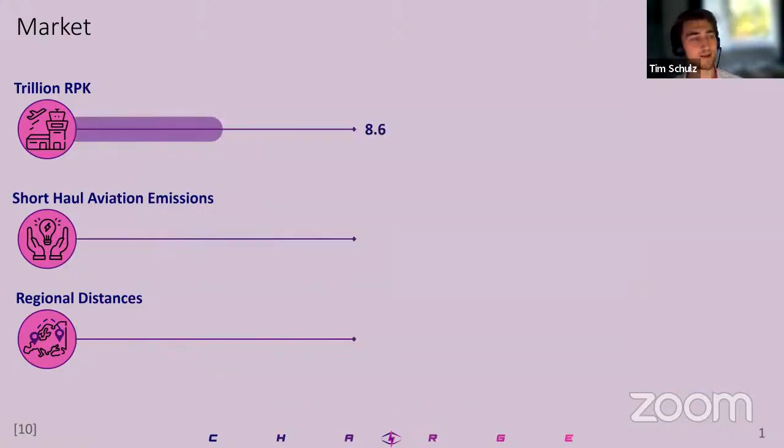Before we started to design a new aircraft, we actually had to figure out if there's any market for it. As stated last year, the aviation industry is still recovering from the previous COVID crisis but will handle the challenge with ease, and is expected to reach about double the amount in revenue passenger kilometers by 2050 compared to last year, which is plenty of market for us and our aircraft.

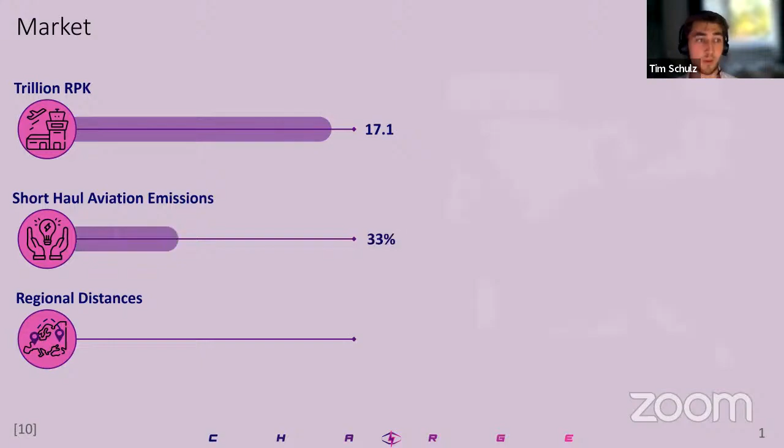That leaves just the question: what market exactly? One of our main focuses is climate change, and roughly one third of all aviation emissions are emitted on short-haul and domestic flights, often covering less than 1,000 kilometers. That's about the range you can see over here on the map.

An example network for those ranges was provided by this year's DLR Design Challenge, and you might notice some of the routes extend well beyond the mentioned 1,000 kilometers. Northern Germany is quite rainy and dark, and the winter isn't that nice, so it's tempting to go south to the warm Italy.

But it's kind of hard to design an aircraft for such a variation of ranges, which is why we were allowed to consider stopover flights, reducing the actual required range to about 900 kilometers—roughly the distance of Hamburg to Edinburgh.

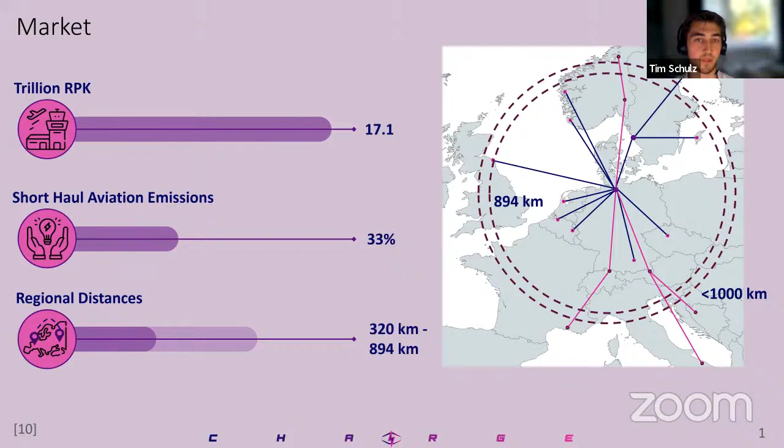It's noticeable to say that for all those ranges and routes, the DLR provided within the task an amount of route demand and a minimum and maximum amount of takeoff and landing slots at the airports, which predetermined the aircraft to about 60 to 120 passengers. That's going to be important later on. But first, let's go back to the routes—how are we going to fly those climate friendly?

It's prognosed that by 2050 air travel will increase, and sadly the greenhouse emissions will roughly double. So it's one of the only sectors that by 2050 will actually have a growth in CO2.

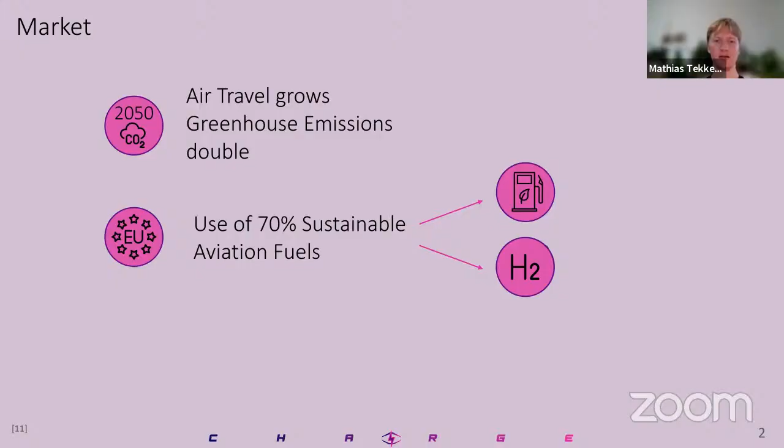But the EU is trying to combat that. By 2050, the EU wants to use 70% sustainable aviation fuels for air travel. There's a legislative act called the Refuel EU Act, and according to that act, only hydrogen and sustainable aviation fuels are considered CO2 neutral. But it's still only 70% of sustainable aviation fuels. So by 2050 and after that, commercial aviation in the EU wouldn't be exactly CO2 neutral.

If you look at another energy carrier, namely electricity, it's prognosed that by 2050, up to 94% of energy generation in the EU would be renewable, so with a very low CO2 footprint. So it can be assumed that by 2050, electricity is a good source for CO2-free energy.

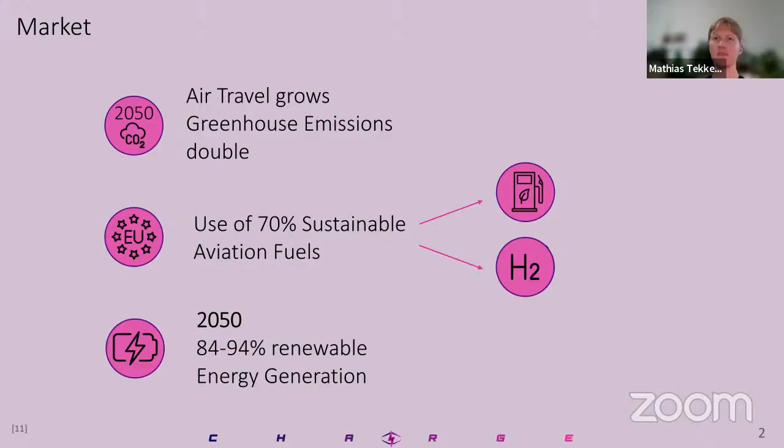But let's also look at the efficiencies of these energy carriers in more detail. In the assignment, we were given to use either SAF, hydrogen, or electricity. On the left side, it shows the total grid-to-shaft efficiency of these energy carriers. It's noticeable that sustainable aviation fuels have quite a low energy efficiency of up to 20%. Hydrogen is marginally better with up to 30%, but battery electric is the most efficient with 77% total efficiency.

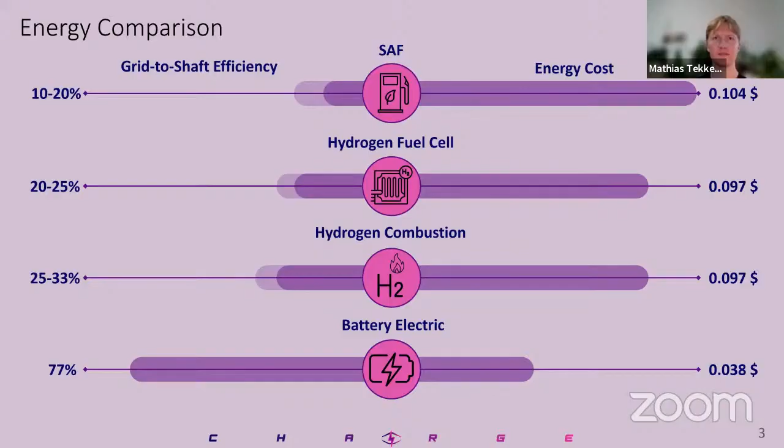Also, when looking on the right side for the energy costs that were also given to us in the assignment, it's noticeable that battery electric is almost a third of the price of hydrogen. So in combination, it's an energy carrier that has a high efficiency and also a low cost. So we were also asking, what do we need for energy, for battery electric flight? What is actually technically necessary?

To combat this, we limited our design to a 40 ton final MTOM and assumed that the empty mass fraction would be around 50%. From there, we deducted that the minimum usable specific energy for our battery packs should be 700 watt-hours per kilogram. And then the feasible empty mass fraction of the aircraft is at 50%.

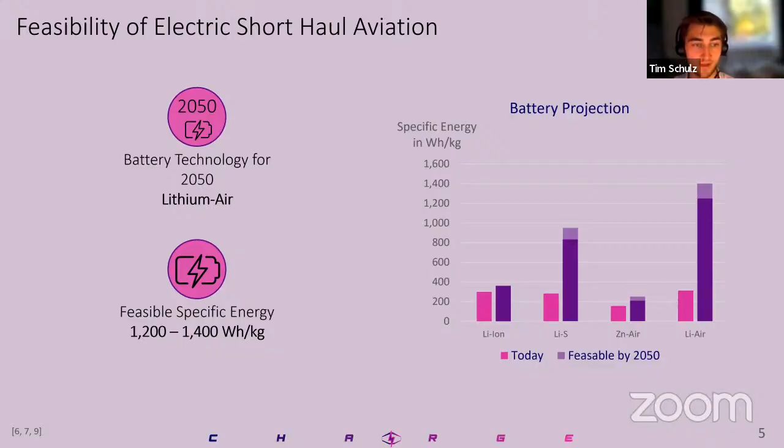But there's another alternative, lithium air. Those batteries bind oxygen from the surrounding air while emitting energy, and are expected to reach up to 1400 watt-hours per kilogram of specific energy in the battery cell by 2050, which is far more than we require for a feasible battery electric aircraft. So to come back to the earlier question, what is necessary for a battery electric aircraft? Lithium air batteries — and they will be there by 2050.

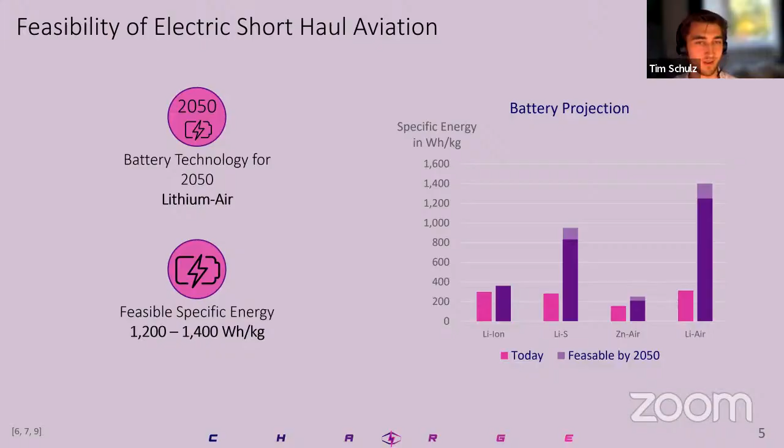So this is why I can introduce charge.

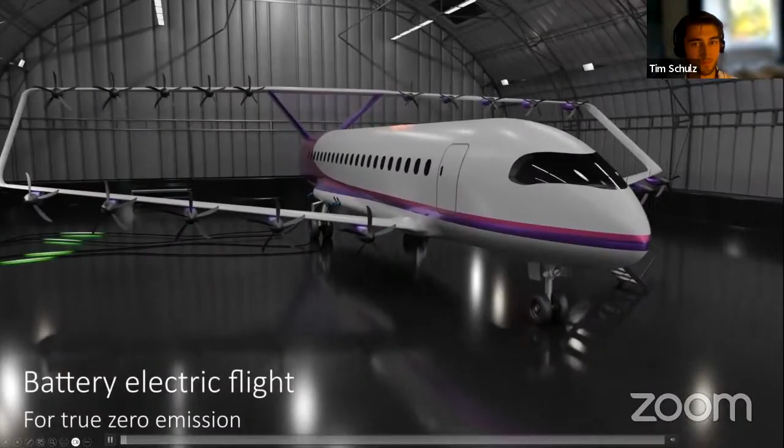Oh, I'm sorry. So I think now you should.

Charge is our carbon-neutral, high-efficiency aircraft for regional electric flight. The marvelous design is characterized by a futuristic-looking box wing, which on one hand provides excellent in-flight efficiency, but on the other hand keeps the wingspan quite low.

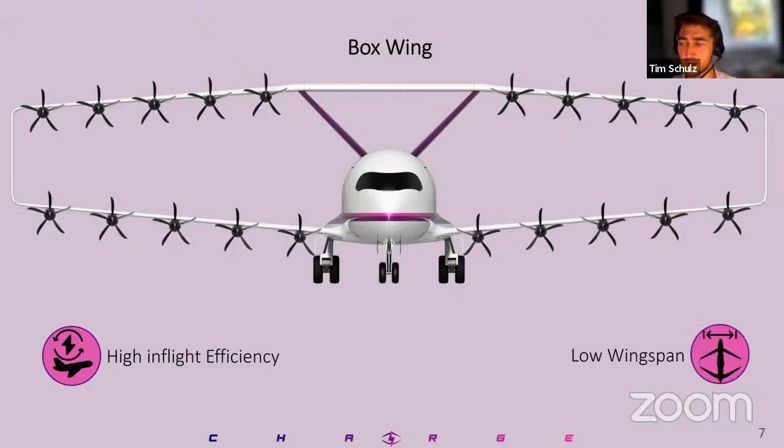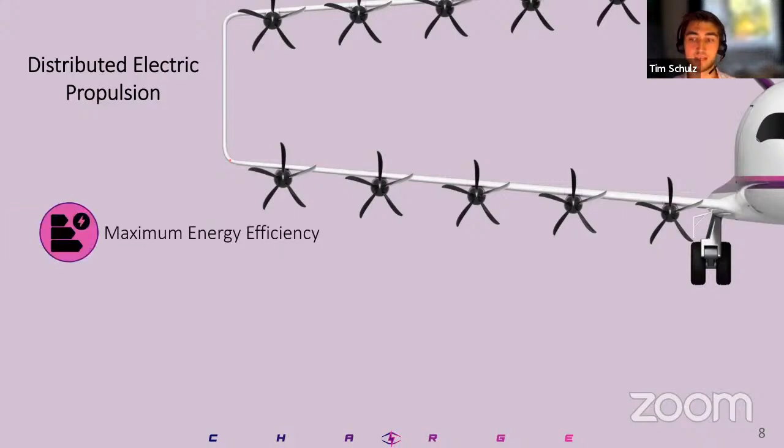Along the wing's edges are spread out 20 propellers, providing us with distributed electric propulsion, which leads to maximized energy efficiency, even during climb and approach, which we do quite steep to reduce noise emissions as far as possible. And since we're using electrical motors, they don't require much maintenance and can cut some costs in this department.

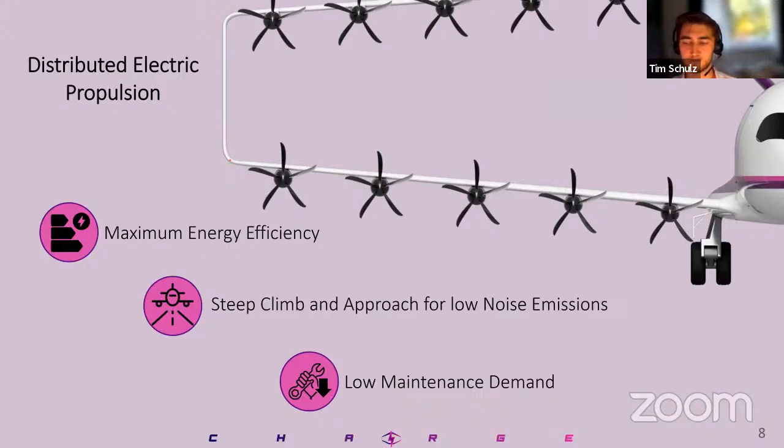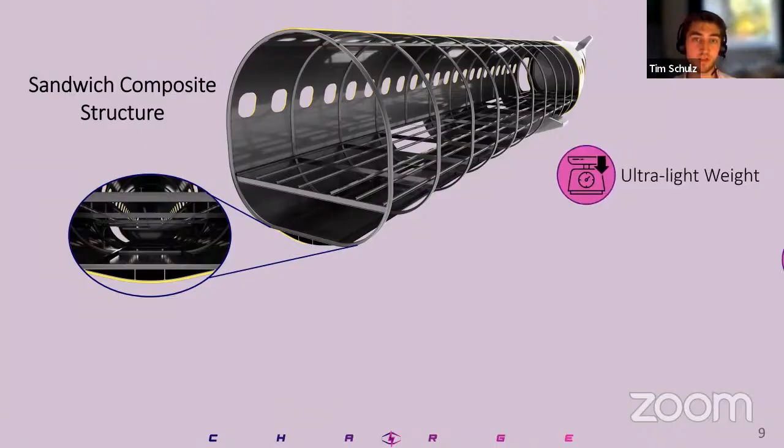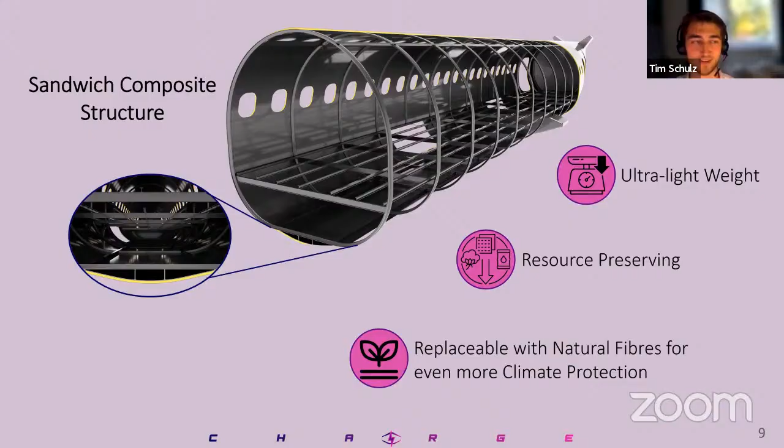Strapped to the wing is our fuselage, built with a sandwich composite structure, which is ultra lightweight and preserves a lot of resources. If technology is ready by 2050, we are opting to enhance or even substitute as many carbon fibers with natural fibers as possible to reduce waste, further reduce emissions, and protect the environment as much as we can. But those are just some empty words - we're engineers, so of course we calculated why Charge is so ideal for its use case.

So as mentioned before, we were not given a specific configuration for the aircraft, but rather a route network and the amount of passengers we had to serve. Based on that, we could have a configuration between 60 or 120 passengers in each plane. The question was, how do we calculate the perfect design for this design mission?

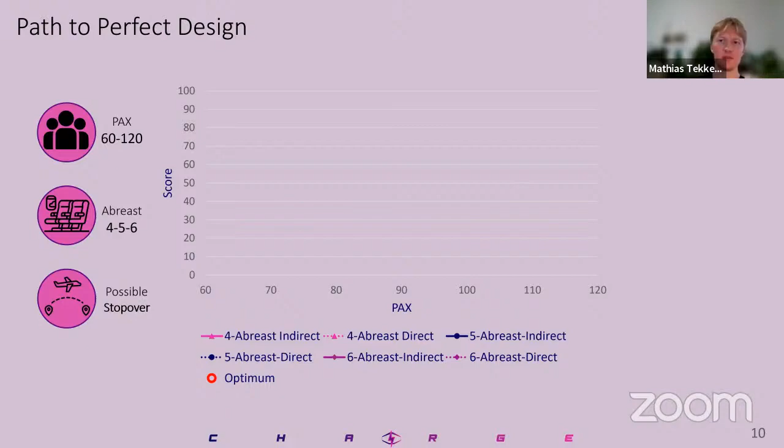For that, we developed a complex iteration process where each abreast and passenger configuration was actually calculated. So each configuration in the plot shown here is actually a valid aircraft design. We also developed a scoring system to score the configurations, and we weighed energy consumption at 70% and the seat kilometer cost at 30%.

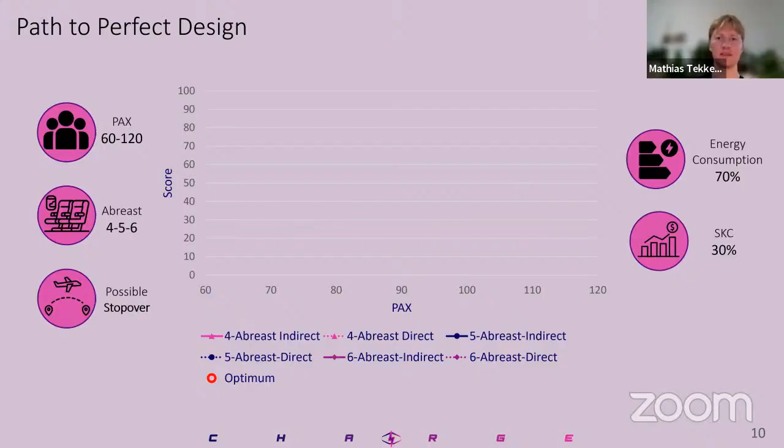In the final configuration, the most efficient was a 110 passenger configuration using the indirect flight network. It's also noticeable that there are two trends on this chart. Firstly, with the increase in passenger numbers, the scoring gets better as the aircraft is more energy efficient per passenger kilometer. It's also noticeable that all the indirect flight configurations with the max range of 894 kilometers have a much better scoring than the direct flight networks.

This can be explained by the increase of the battery mass that's required to fly the 1,400 kilometers compared to the 894 kilometers.

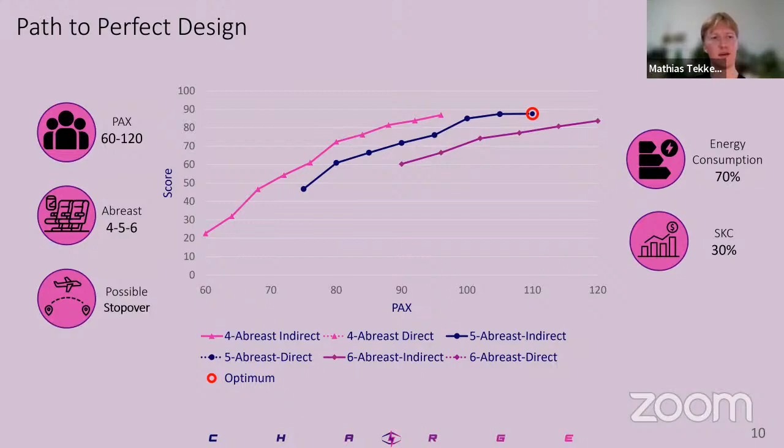In the cabin, the aircraft would have 3 crew members to assist the passengers during their flight or in any emergency cases. Otherwise, it's quite a conventional commercial aircraft with a few galleys and a few bathrooms at the front and back.

But let's also look at the outside dimensions. Because of the box wing design, we were able to limit the wingspan to 28 meters. The aircraft is in the ICAO Aerodrome Category C, which is very useful for our flight network as we have to service smaller regional airports. Otherwise, the aircraft is roughly 31 meters long and just under 8 meters tall.

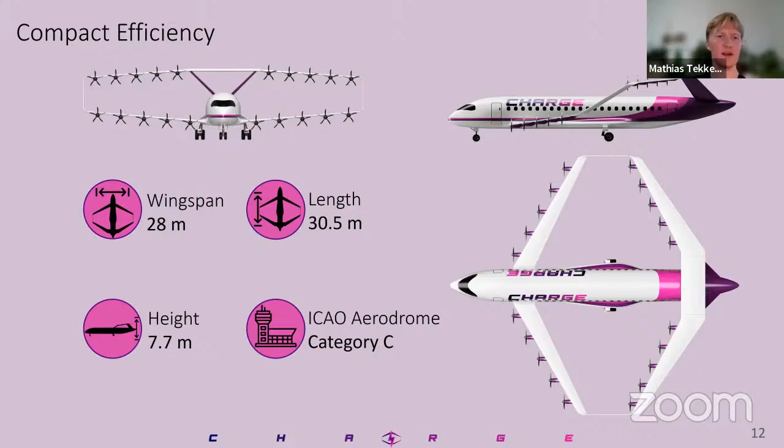When we look in more detail at the mass of the aircraft, we see that we did reach our goal of staying under 40,000 kg MTOM as we tried to during our feasibility study with the Breguet approximation. Only a fourth of the aircraft's final mass is actually the battery, with roughly 9 tons. Interestingly, we also stayed at 50% operating empty mass, which we also assumed in our first approximations.

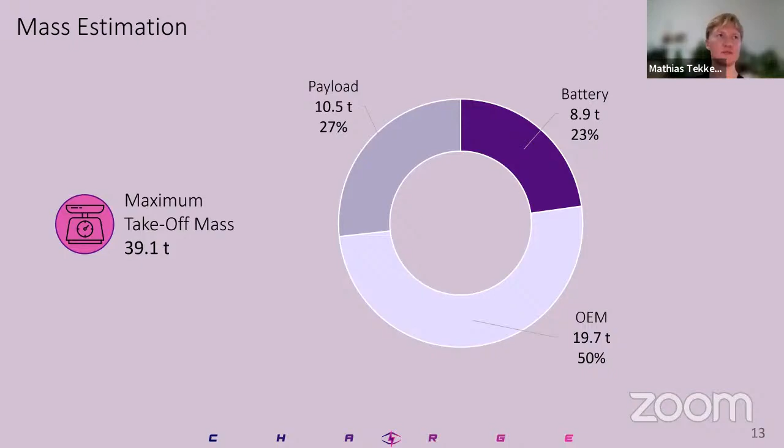But let's look in more detail at the batteries. The batteries have a total energy density at the pack level of 1,200 watt-hours per kilogram. But if we consider depth of discharge protection and degradation, the usable energy density is 720 watt-hours per kilogram, above the minimum that's feasible for an electric aircraft design.

The lithium-air batteries are divided into 4 battery packs under the floor of the cabin, and they can be easily removed by openings on the starboard side. They can be charged over 4 charging ports, so each pack is charged individually. For the maximum range of 900 kilometers, it only takes 26 minutes to charge them.

The batteries themselves are quite safe as they cannot self-inflame, but each pack is still self-contained and also has an extinguishing system in case of emergencies.

We also took into consideration that every 1,500 full cycles, the batteries have to be exchanged as their charge holding capability falls below the requirement to fly the aircraft in longer ranges. But this is not a considerable issue as they can be changed every 23 months during the overall C-check of the aircraft, and it doesn't cause any operational issues.

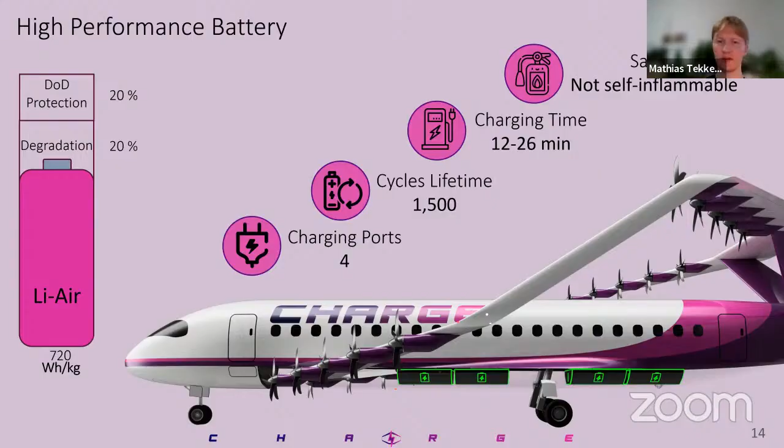Now let's also look at how the batteries and the electric motors are connected to one another. As we just learned, our aircraft has 4 battery packs, and they somehow have to be connected to the motors. We can't just put a cable through the aircraft body and hope it will work. So we had to figure out a lightweight and redundant way to do so, which is why we applied a 3-bus multi-feeder architecture, looking about like this, which is very overwhelming since there are a lot of cables, lines, points, and buses. So I tried to simplify it a little, which would make it look like this.

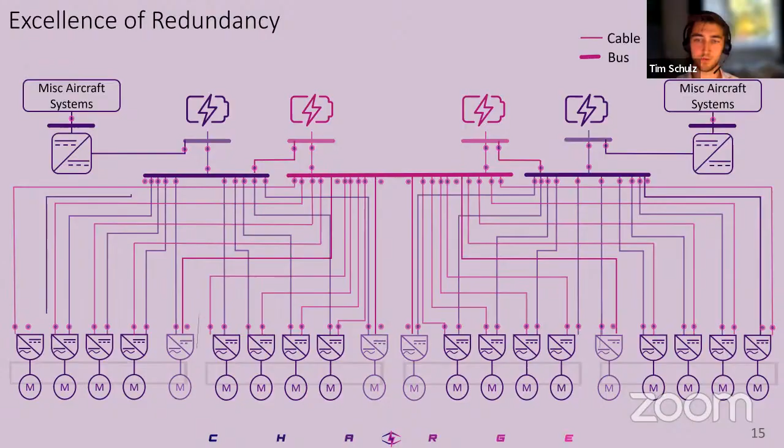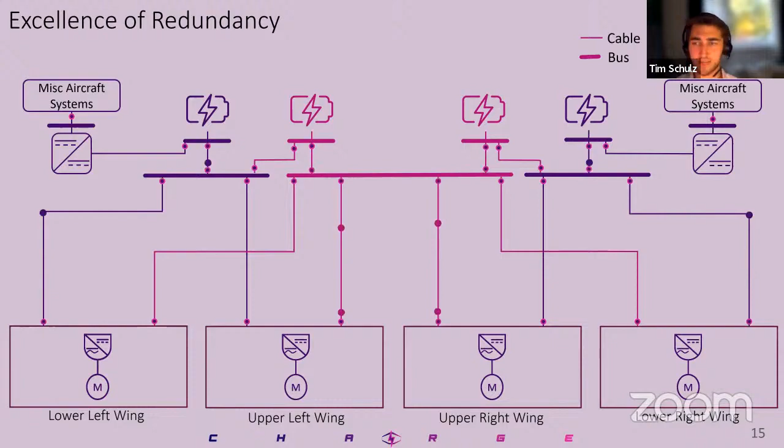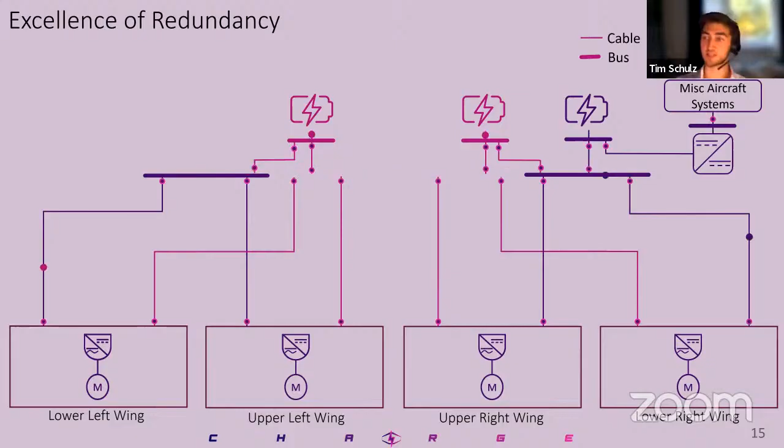Right now, we're assuming there's just one motor per wing, and let's see how it's redundant. Every battery pack is powering its motors, since there are 4 wings, 4 batteries, 4 motors. It works this way. But let's just assume one battery fails. It's highly unlikely, but let's have a look. Even if a battery fails, you would still be able to operate all 20 motors on full power. And in this configuration, we could even say the center bus fails as well, and we would still be able to operate Charge regardless of the damage, which makes us very redundant.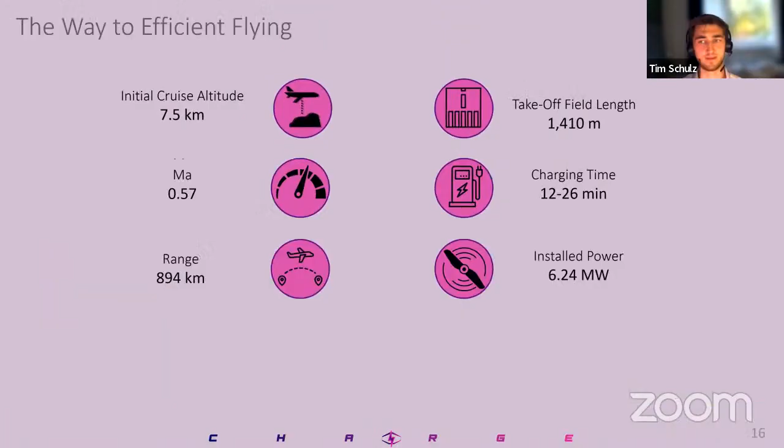But let's have a look at Charge operation. While flying throughout Europe, since that was our task given by the DLR, with about 900 kilometers of range, we had to overcome some obstacles like the Alps, which is why we chose an initial cruise altitude of about 7.5 kilometers and a cruise speed of Mach 0.57. On the ground, we're taking off in just over 1400 meters, thanks to the installed power of 6.24 megawatts, which enables us to operate even from smaller airports, like the regional ones we had to operate from. Our charging time is about 12 to 26 minutes, depending on the range flown before.

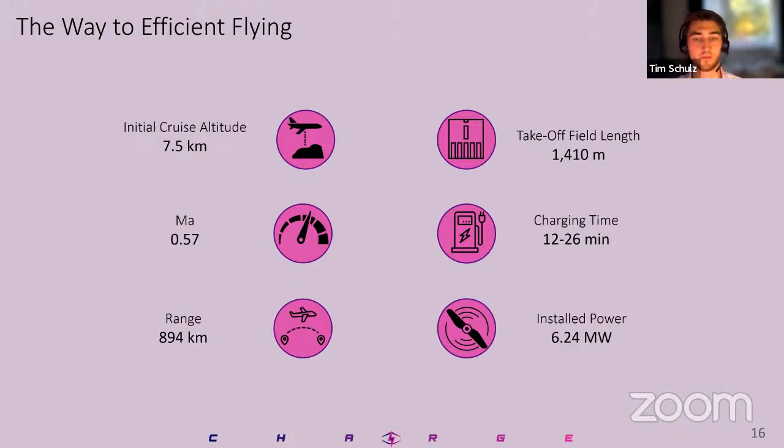But let's have an even closer look at Charge's mission. At first, we board the aircraft, fast and efficient, thanks to the built-in air stairs. We've already boarded and we're pushing back, thanks to the built-in front-wheel motor, on our own. So right now, we're completely independent from airport infrastructure. After pushback and taxiing, we take off, because of our distributed electric propulsion, in no time and very steeply, to reduce noise emissions as far as possible.

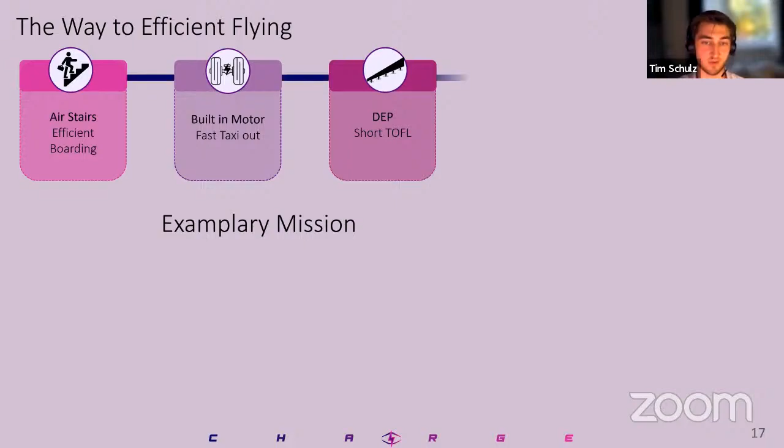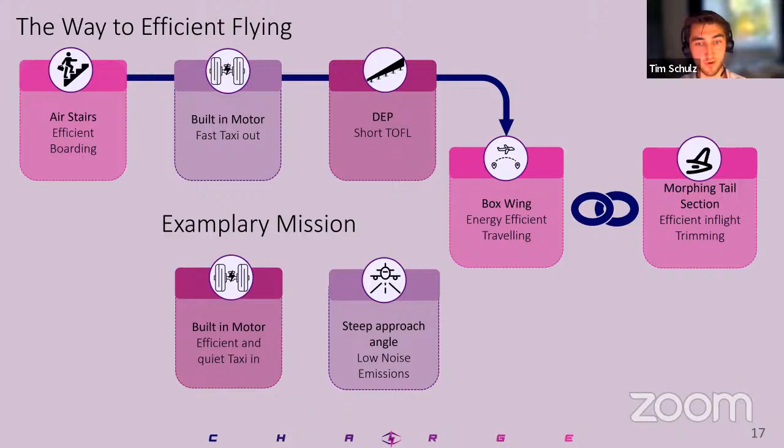In the air, we're very efficient, economically thanks to the single pilot operation, and ecologically thanks to the very efficient box wing and the morphing tail section right in between the V-tail. After flying, even though it was very nice, somewhere we have to land, so we land, of course, again very steeply to reduce noise emissions as far as possible. After that, we taxi back to the gate or airfield position, and while boarding, of course, we charge, which is a huge advantage of battery electric flying compared to other energy sources.

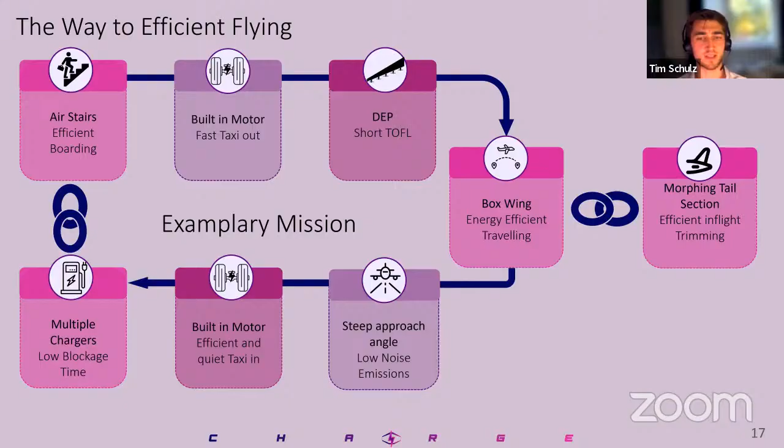But again, those are just some words about Charge's mission. Let's have a look at some numbers. To fill our passenger requirements in the given network, we need 4 planes in total to cover the whole network. On average, 102 passengers are transported in each plane, which is over 90% fulfillment rate of the 110 passengers in total. 90% of the time, the aircraft are utilized, which leaves a nice margin for any delays.

If you look in more detail at the seat kilometer costs of the aircraft, the average seat kilometer cost is just over $0.07. Very noticeable in this diagram is that the energy costs are only at 3%. This is explained by the quite low energy cost for the electricity we were given, and also the high efficiency of our aircraft. Also, the crew costs are slightly reduced thanks to the single pilot operation capabilities.

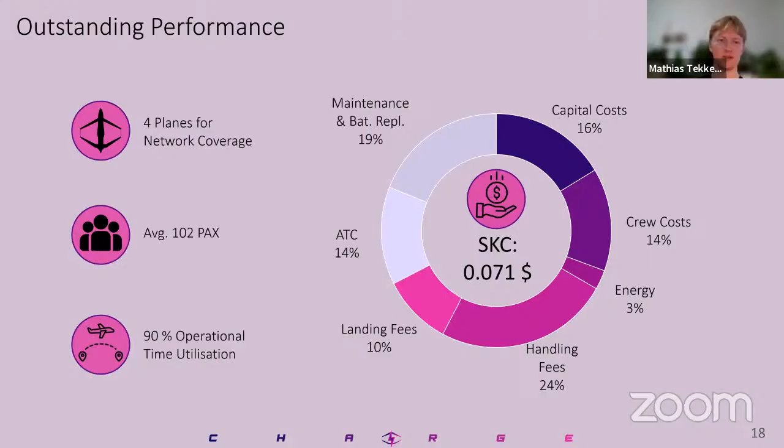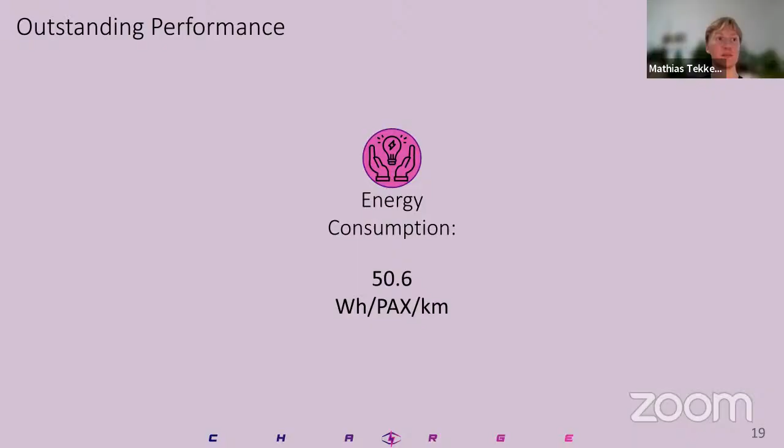But let's look more in depth at the energy consumption, which was one of the main criteria for our aircraft design. This is at 51 watt-hours per passenger kilometer, which is considerably lower than comparable aircraft like the Dash 8, which uses over 6 times more energy than Charge would, when looking at the energy equivalent.

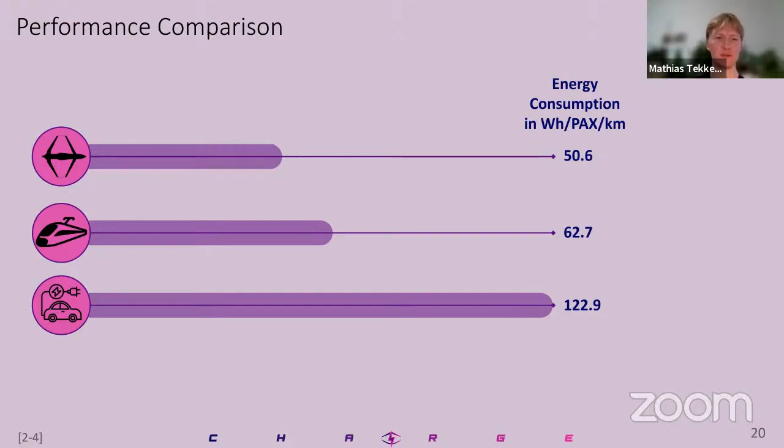We were also curious how our aircraft configuration compares to other transport systems, like fast trains or electric cars. Even in this case, the aircraft uses less energy per passenger kilometer than an electric train, and almost 3 times less than an electric car. This is partly also explained by the higher usage rate of the aircraft compared to trains and cars, which are sometimes only half filled.

We were also looking at how this compares time-wise to trains and cars. If we look at one of our connections in the network, Hamburg to Munich, which is roughly 600 kilometers from the north of Germany to the south of Germany, our plane could do that connection in slightly over an hour, while the train would take over 5 hours, and the car roughly 7 hours, if there aren't any traffic jams or delays.

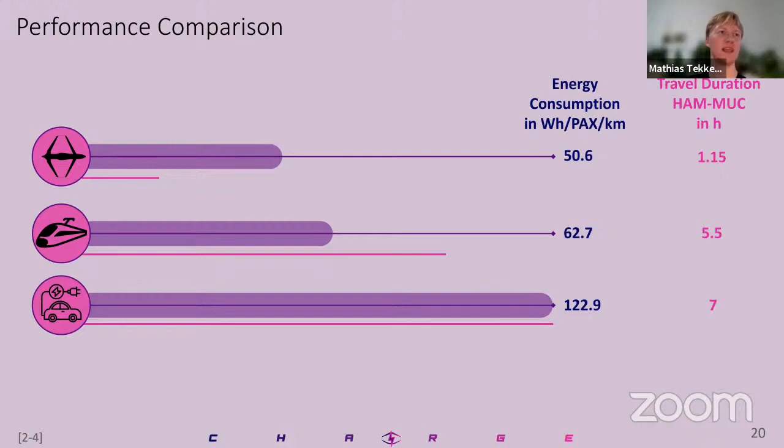So if you would summarize our concept, we have shown that battery electric flight is by 2050, at least in Europe, the only true zero-emission commercial flight option. All of the other options, hydrogen or SAF, would probably have a higher CO2 footprint. But to achieve this, we need a highly efficient design, which is possible with the box wing and distributed electric propulsion. Even though it might sound expensive to build a battery electric aircraft that only flies 900 kilometers, we have shown that due to the high efficiency and ease of operations of our configuration, it's also economical compared to other aircraft in its class, or even aircraft like the Dash 8 nowadays.

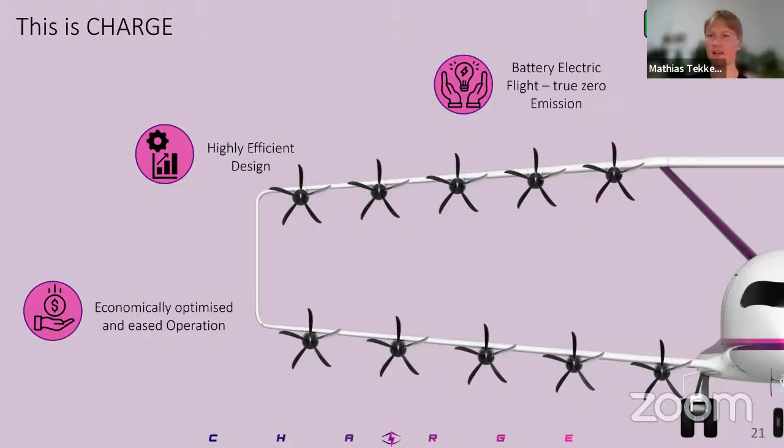So yeah, this was our design, and we were very glad we were able to present it. Well, of course, we weren't perfect. There's some considerations and flaws we saw later on.

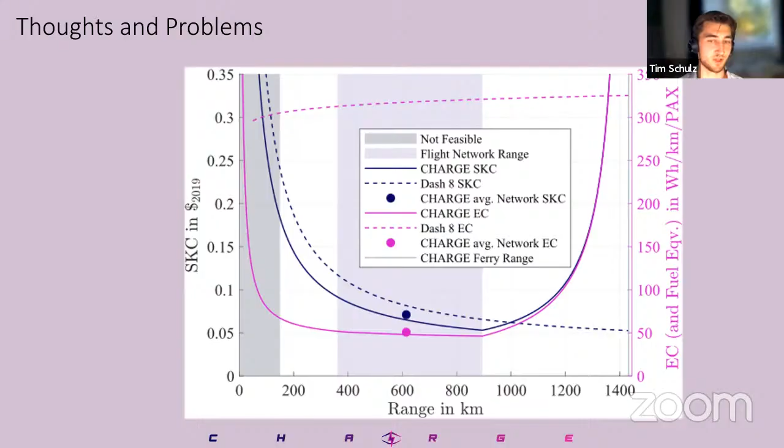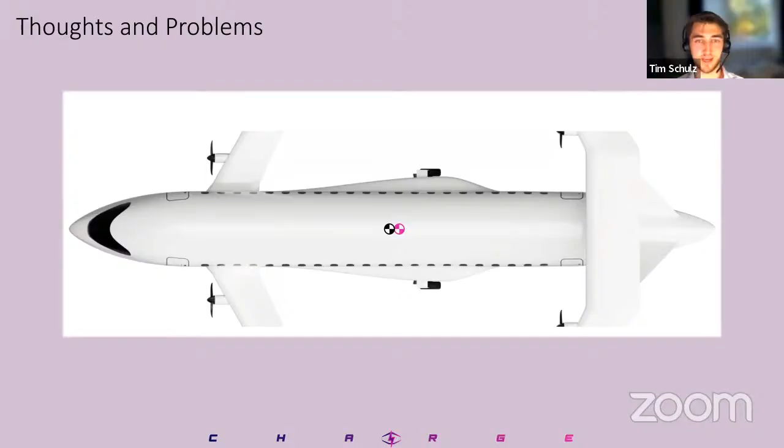For example, on this graph, we noticed we could shift the graph a little to the left, for example, to further increase efficiency, especially cost-wise, since our average network utilization isn't at the optimum, and there could be some gains made. As well, the box wing concept in general is kind of hard to design flight mechanically, as well as it's not able to stretch or shrink the aircraft because of those weird flight mechanics and it's hard to design.

And at last, because the batteries take up a lot of space, there isn't any room left for luggage, which wasn't given by the DLR, but well, short regional flights often transport people who then go on long flights and long haul flights. And for those flights, you need luggage and big luggage. There's no space on charge for that right now. Of course, you could argue that in the future, as the battery energy gets more dense, there could be some room for those luggage compartments while keeping the range of charge the same. But that's something we haven't looked at, and that would be something for the future.

Thank you very much, Tim and Mathias. And before we have maybe some questions from the audience, thank you so much for your time, because this is the future, definitely. We can maybe discuss about when we will have the technology, but definitely if we want zero emission, that is a fact.

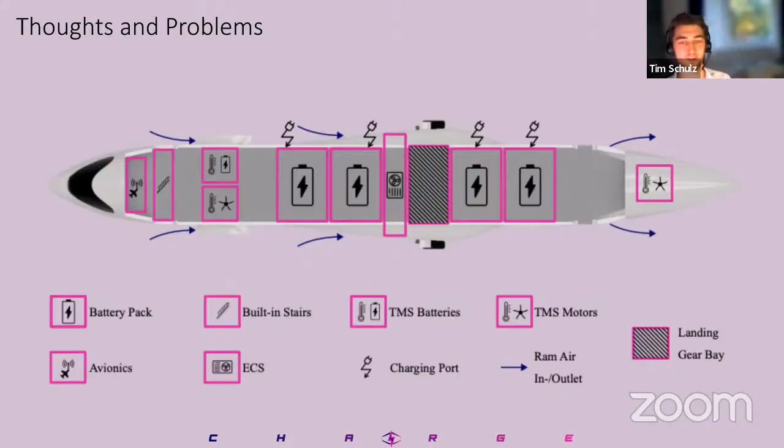Besides, another question is about the engine. You normally - and we have seen many designs that include many motors, electric motors, not only a couple of big ones - what is the iteration that tells you it's better to mount many electric engines instead of maybe 2, 3, or 4? What is the main explanation for that - is it structural?

In this case, we were also searching the literature for high efficiency electric engines for aviation uses. What we saw was that until 2050, it's very likely that the maximum power of these very high efficient electric motors wouldn't be enough to just use 2 or 4. So that was one requirement.

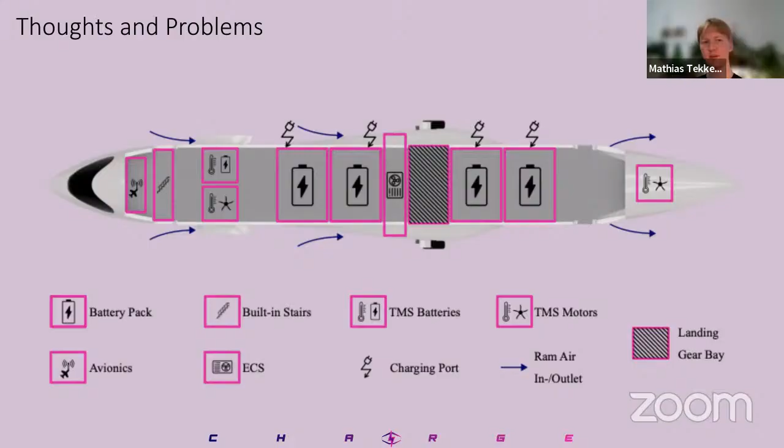There's also research showing it's possible to reach a higher CL max when using a good flap system, which we also considered for the aircraft. So that's one of the thoughts behind it - to use small engines which are more efficient and combine them in a way that makes the aerodynamics of the wings even more efficient.

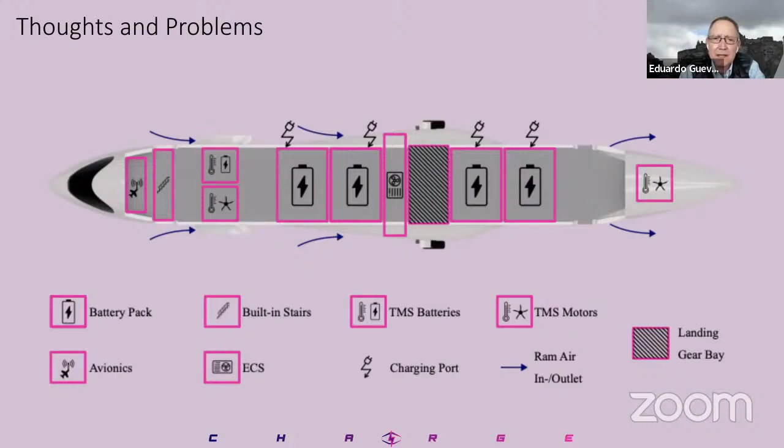Another question from the audience: if batteries can't reach 1200 watt-hours per kilogram by 2050, let's say it reaches 900, do you think it will still be feasible to make electric regional planes? Well, I think it's kind of hard. We started calculating the aircraft with about 900 watt-hours per kilogram.

As you can see here on the Breguet equation, for 900 we would either have to go for quite unrealistic empty mass fractions, or consider a higher MTOM. And with a higher MTOM we need more batteries, and it's a downward cycle. So it's going to be hard with 900 watt-hours - I think we need at least 1,000 to 1,100.

With less, you would have to work with range extenders, since the divert ranges are so huge it's hard for the batteries to cover this. There could be some ways - like if you have to divert, going into more depth of discharge, which could give you 20% more battery capacity, which we didn't consider. We would have never touched those last 20%. So it could go into that direction, I'm not sure. But yeah, I think 900 is the border where you'd have to start working with range extenders and SAFs.

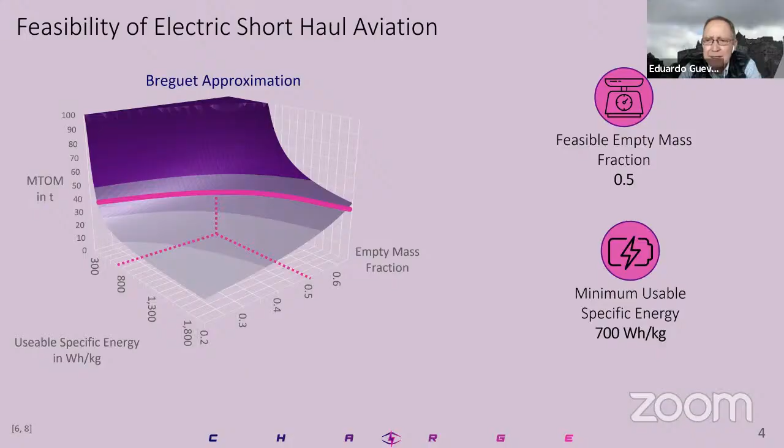That's a good one, because I think we have two main concepts in the safety aspect. One is single pilot operations, which is still heavily discussed in the commercial aviation sector, even regarding whether it's legally possible in the future, even though technically it might be. In our case, even a dual pilot operation wouldn't be a killer for this concept.

Another thing is the whole electronic system, including the batteries. We assume that by 2050, lithium-air batteries, which are now still in laboratory tables, would be usable and safely usable. They have advantages compared to lithium-ion. There's also the whole issue with high-power electronics necessary for electric aircraft—components that haven't been developed yet since there's no need for that in commercial aviation yet. They'd also have to be strictly tested because of the high voltages, currents, and powers that would go through the system.

This is also one of the things we saw in our technology readiness level research—batteries have a quite low readiness level nowadays. The other options, like fiber composite fuselage, are not that high tech; the A350 already has that, and Airbus is doing research with thermoplastics. Then there's the box wing, and specifically the control system for it, flight mechanically, would be interesting and difficult to design, to have a configuration that's always in stable flight, as this wing configuration has peculiarities when dealing with stability, dynamically or mechanically.

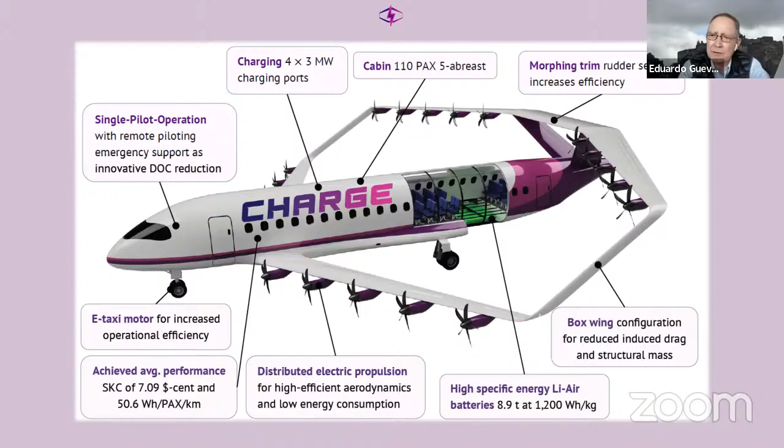Okay, right, great. Indeed, it's a very interesting project. Knowing the situation now, how do you think foreign industries outside of Europe could participate in this kind of project? Is there something just for European countries, some agreement? I ask because in the United States they're putting about $1 billion to fund projects like this, NASA and the government. So that's my question.

Difficult one, because you're right that the DLR is very German specific. This competition was only for German universities. There used to be one 10 years ago together with NASA, but they stopped it. Otherwise, for universities outside of Europe...

I think one option, what's common in German universities—I don't know for others—is that students themselves come together and form a research group, and with the help of university faculties and personnel, they're able to build their own small aircraft or drones and research topics like this, or do flight mechanics and flight control research. That's something we also have in our university—smaller student projects that come together. They get some financial aid from the university, but also ask companies for sponsorships, do the work themselves, write papers about it, and get credits for it.